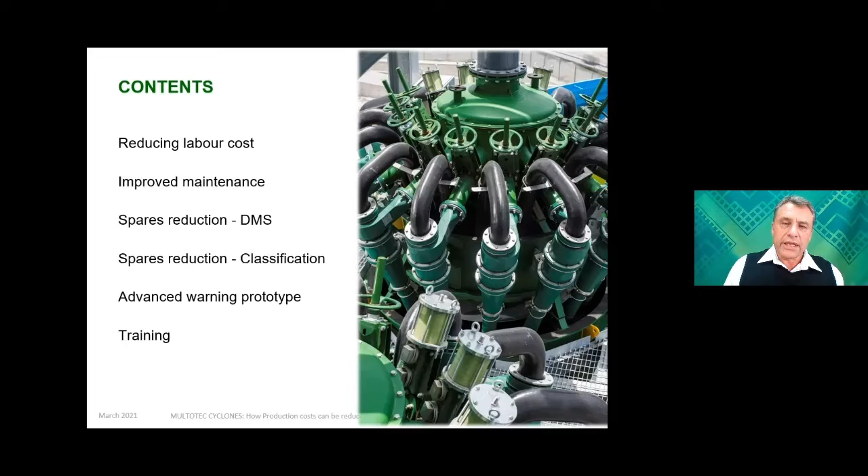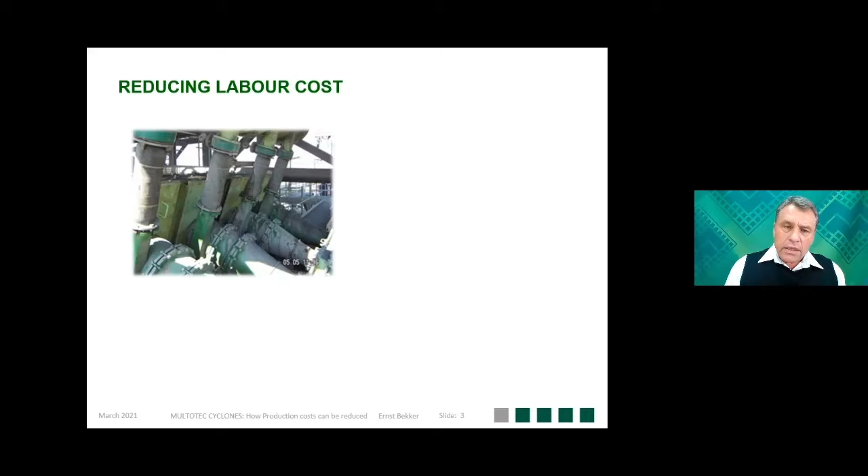In this application, in terms of the reduction of labor costs, it's a pre-concentrating dense media separation process, feeding then a mill section. These cyclones originally were cast iron, with an expected life of about 1.5 months.

The client requested to see if we could improve the operational life of the unit. So we suggested that we rotate the parts during every maintenance, 90 degrees, and that extended the life up to 2.5 months.

During the initial stages of this operation, it was found that there were relatively frequent blockages at the inlets of the cyclone. The reason for that was that the crusher settings had to be increased in order to increase the throughput through the process plant.

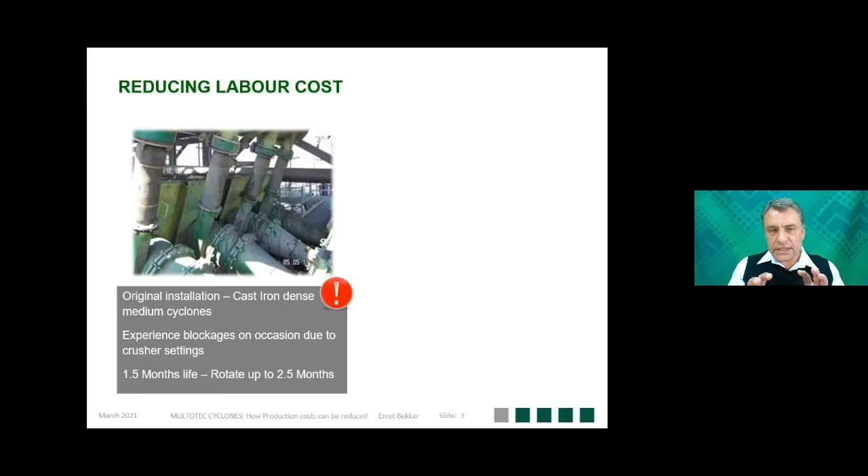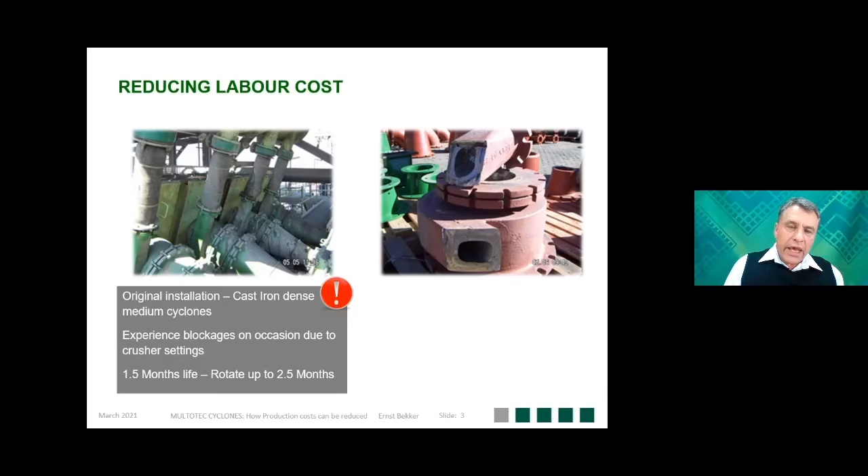So just before the maintenance period, it was then noticed that these blockages started to diminish, and the decision was made to take one of the worn units, cut the inlet open, get the dimensions, and a new cyclone was supplied for this process.

A ceramic lined cyclone, because to make modifications to a casting is not that economical, quite expensive. By converting to the ceramic lined cyclones, the operational life increased to 3 months without the need to rotate parts, which helped the client with cost saving in terms of reduction of labor.

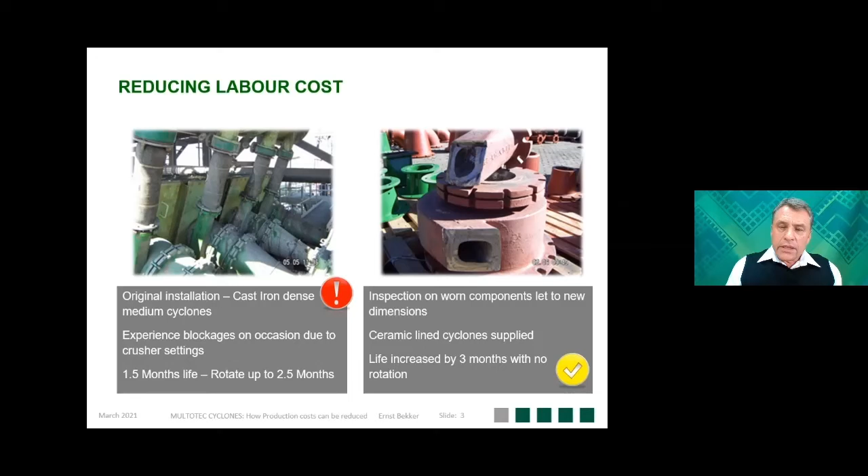He doesn't have to every time get people in to help loosen the bolts and rotate the parts and put them back together. The client then asked if we could continue looking at improving the life.

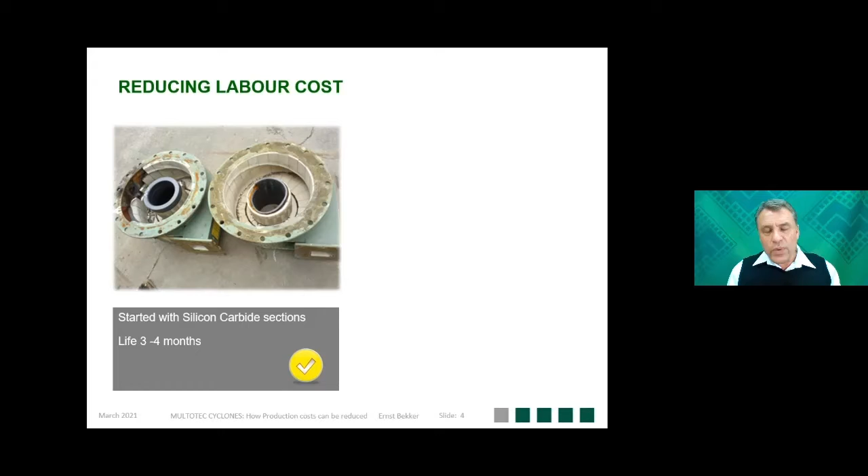So we started to look at silicon carbide. We had to make some design changes to improve the life of the unit, and we end up now with a unit that's completely silicon carbide, and the operational life is now extended to 9 months. All indications are it's possible to extend it further.

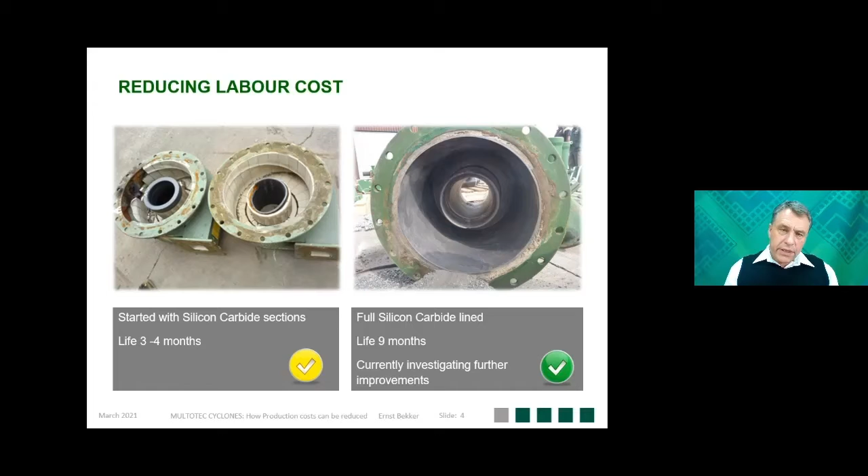So the cost saving at this point between a silicon carbide unit and the cast iron original cyclones is about 1.4 million rand per annum, or about $99,000 US. Compared to the ceramic lined option, 640,000 per annum, or about $44,000 US.

Now it's not big money, but, and this is important to remember, this cyclone sits before a milling circuit. And what the client noticed just before maintenance had to be commenced was that the yield, the amount of mass going through the spigot of the cyclone towards the mill, became too much.

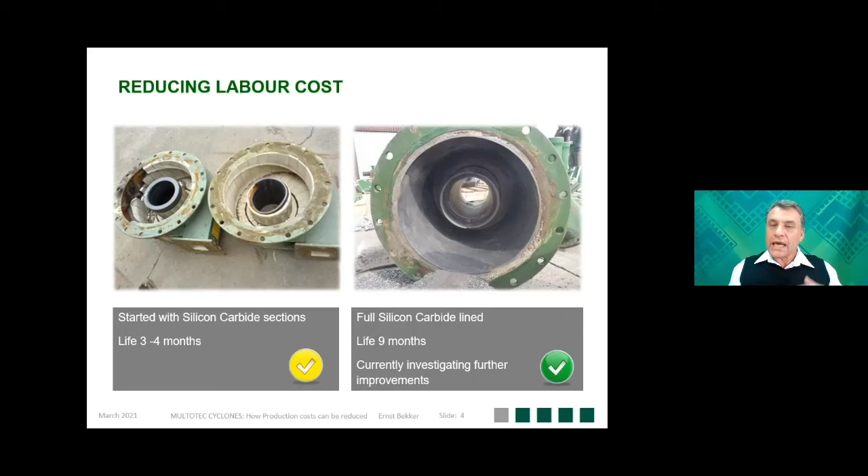They had to cut back on feed to the plant. By having the cyclone now operating with more consistent operating parameters, it's streamlining the throughput through the plant as well, and there's additional cost saving.

And then the maintenance is sometimes neglected. And when you neglect the maintenance, the cyclone efficiency starts to become affected, and that spills over into the rest of the process.

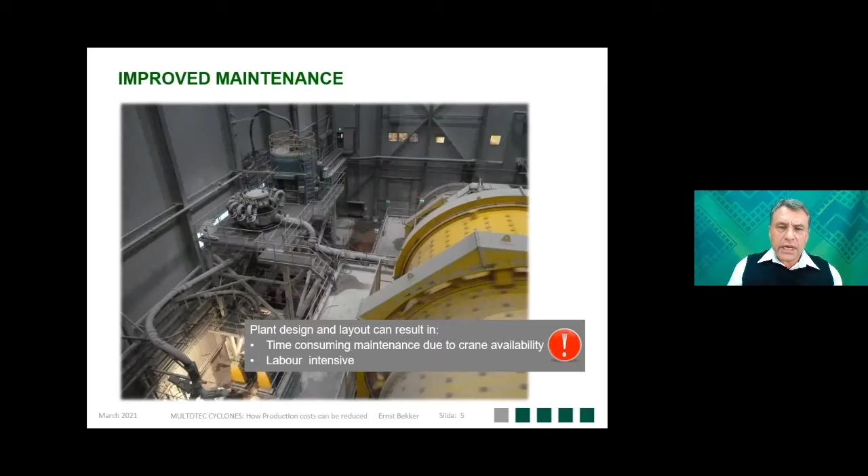So one of the ideas that we came up with is to incorporate a jib crane into a cyclone cluster, so each cyclone cluster has got its dedicated lifting mechanism. You save cost, you save labor, and it's safer to do the maintenance. So there is no competition.

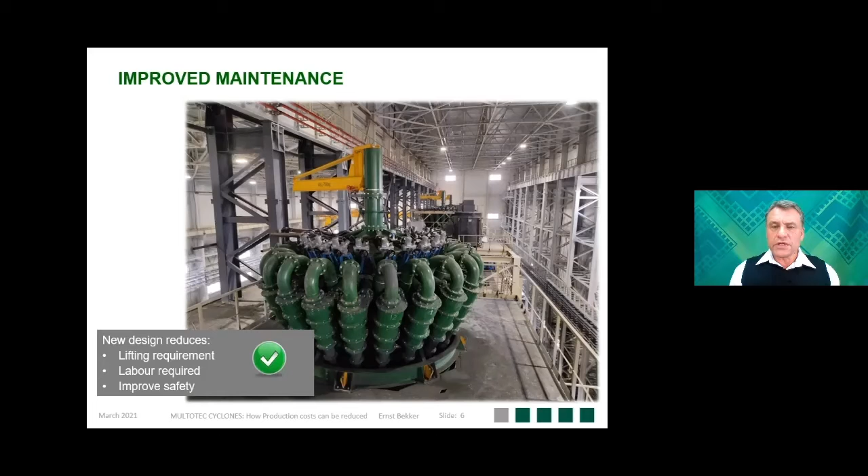You can do the maintenance whenever you need to do it. Because you can now do maintenance on a more frequent basis, you're enhancing the efficiency of this unit or cluster, and thereby also helping with the efficiency of the overall process.

Moving on to the spares reduction case studies. In dense media separation, cast iron is quite a commonly used material of construction.

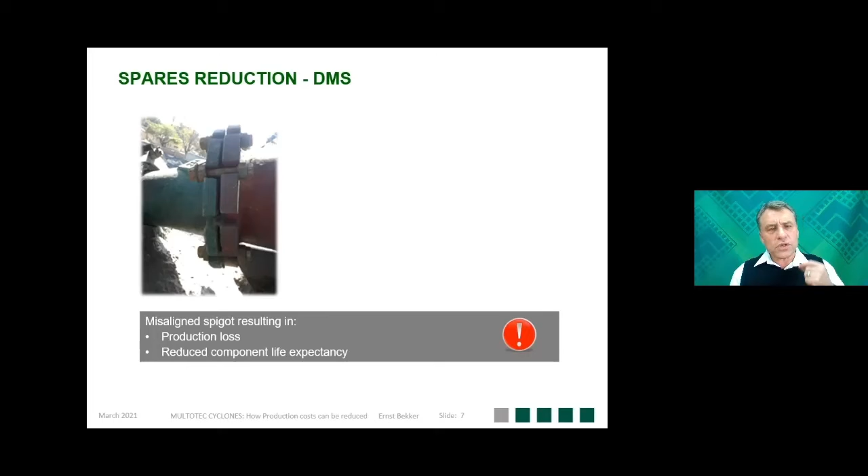This misalignment can cause production losses because it's misplacing material, creating an inward step, misplacing material in the wrong direction. It's also creating aggressive turbulence, and this turbulence shortens the life expectancy of the parts.

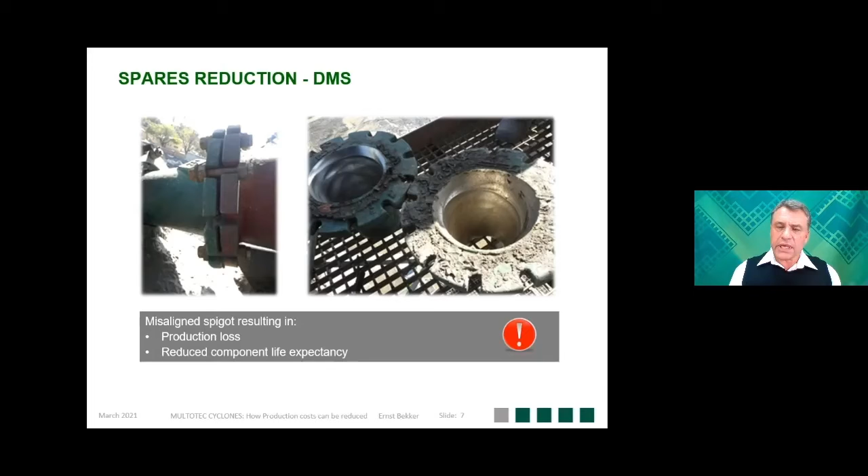The picture on the right shows items from this plant, and you can see the localized wear. The units have to be replaced while the rest of the spigot is actually still in good condition.

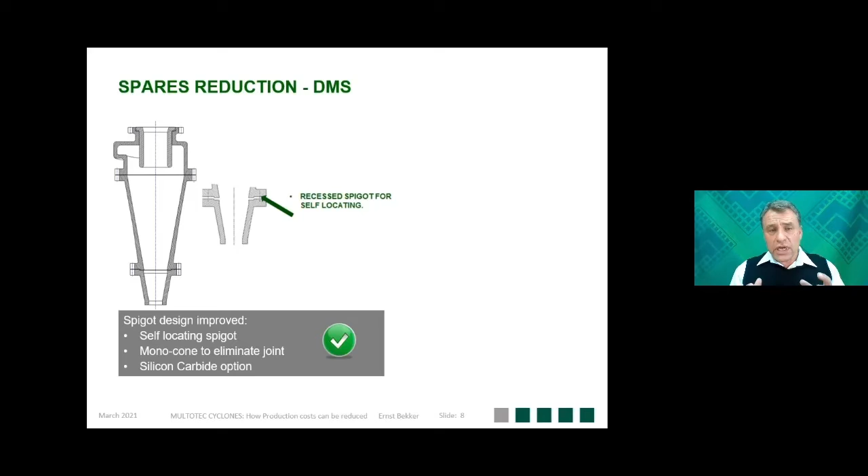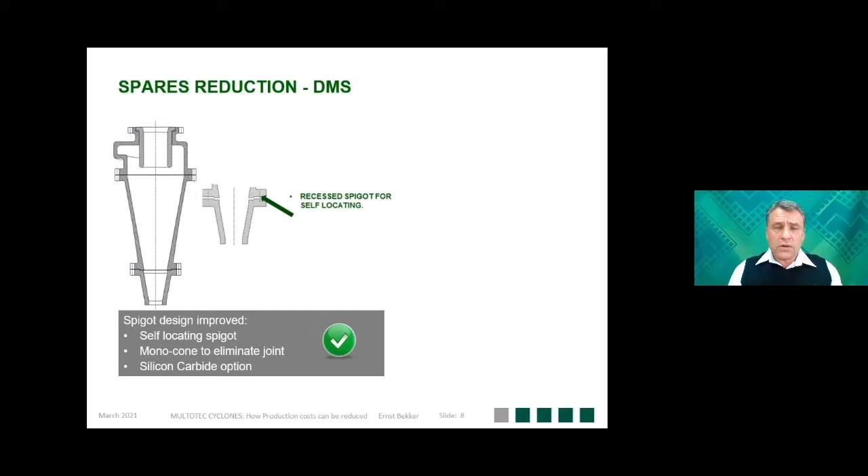So we embarked on a project to relook at our cast iron cyclones, and one of the design changes we've made is to look at the self-locating ring. Now you can locate the spigot and the cone together without the risk of getting an inward step, unless you do it deliberately. That's already helping to enhance the efficiency of this unit over a longer period of time.

Another aspect we've noticed is that in certain applications you tend to get localized wear at the joint between the cone and the spigot. That resulted in us looking at making a one-piece unit called the monocone. This monocone is quite suitable for low yield applications, meaning a small amount of tons going through the spigot.

The reason for that is if you have a high yield application, your spigot starts to wear too quickly compared to the rest of the unit. Then you have to replace the spigot, but now you have to replace the whole unit, so that's not really cost effective. But in applications with low yield, like in the diamond industry, that will be successful.

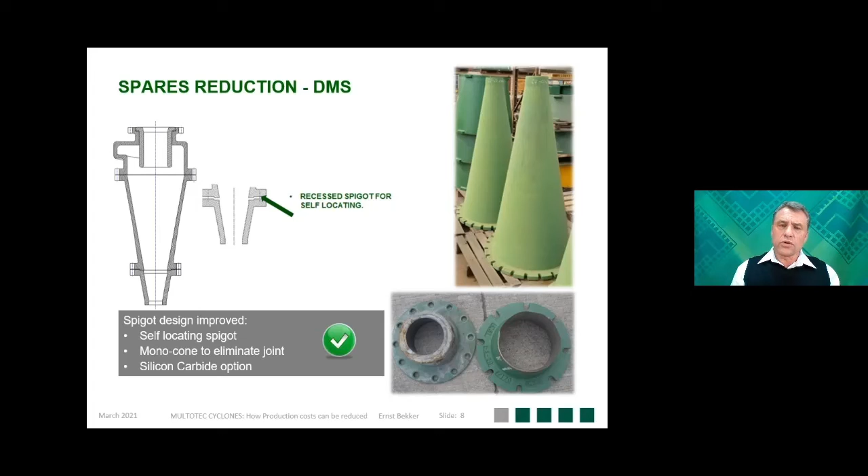For your high wear applications, silicon carbide is again an application that's proved to be quite successful for us. The cost saving on this specific item, on this specific plant, is about 30,000 Rand per annum. So it's relatively small money, but the impact is significant because the cyclone is now operating more consistently, since spigot diameter is a very important parameter for good dense media cyclone performance. That's additional cost savings to keep in mind.

In terms of classification, this is a milling cyclone operating in a SAG ball mill circuit. The material is quite aggressive, as seen in the picture in the center. Originally these cyclones were supplied with polyurethane spigots, and they lasted only 5 days. So the client decided to move over to rubber spigots, and that only lasted 7 days. So the client decided, no, rather go back to the polyurethane spigots.

But because of this continuous use of polyurethane spigots, he sometimes ran out of stock, and then he was operating these cyclones without a spigot. Now, to operate a cyclone without a spigot in a milling circuit is also looking for trouble, because you're placing the whole milling process under strain.

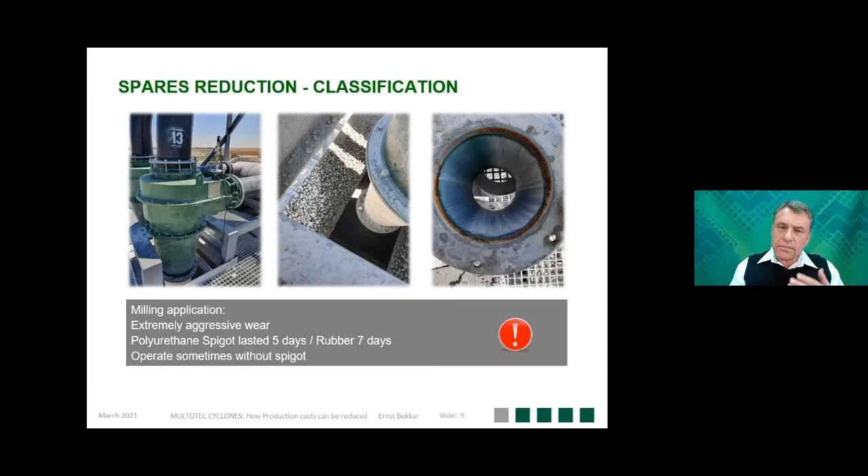So the spigots that this specific cyclone is using, as shown in this picture on the left-hand side, the item on the left is the polyurethane spigot that was used. The item on the right shows a ceramic lining that is encapsulated in polyurethane.

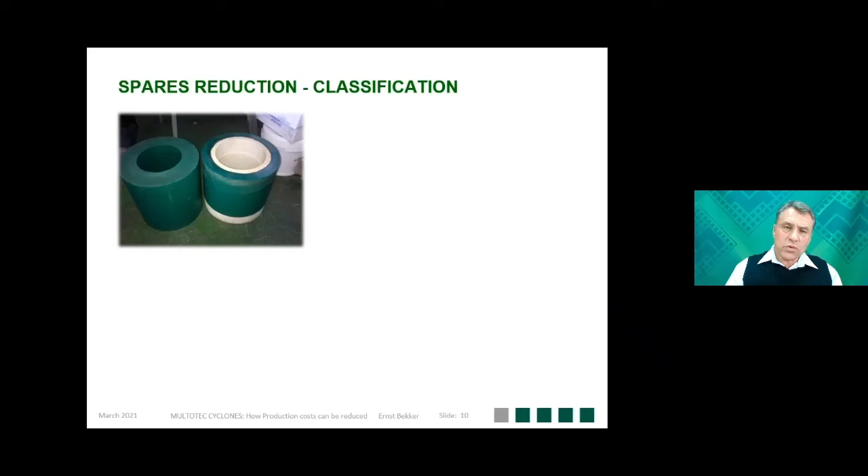Based on the success with silicon carbide, I decided to look at silicon carbide as an option for this specific client. He took the unit, installed it, and I asked to come and inspect the unit a couple of days later. So that's the unit that I had to inspect.

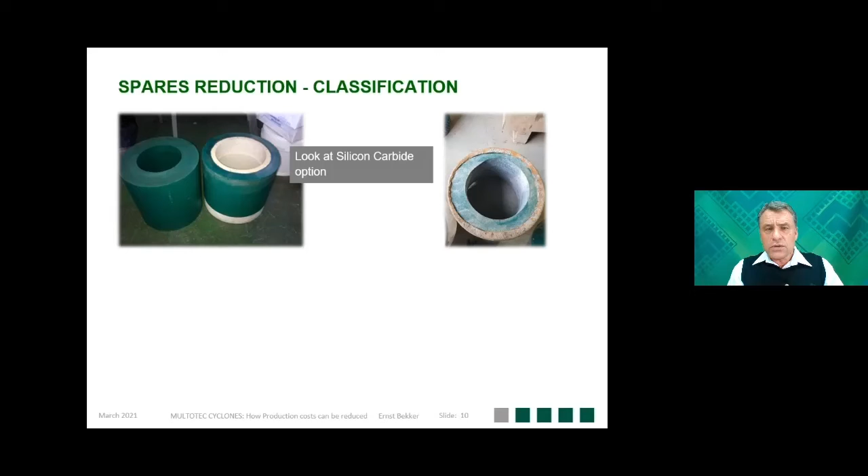I was looking at this unit and asked him, what am I looking at? Because at this stage it looks like the polyurethane spigot. He told me, no, that is your idea of the silicon carbide. It only lasted 4 days. So you're never too old to learn.

The reason why it only lasted 4 days is silicon carbide is very hard, but it's also very brittle. And the type of material being processed through this milling circuit indicated that this is not the right material of construction.

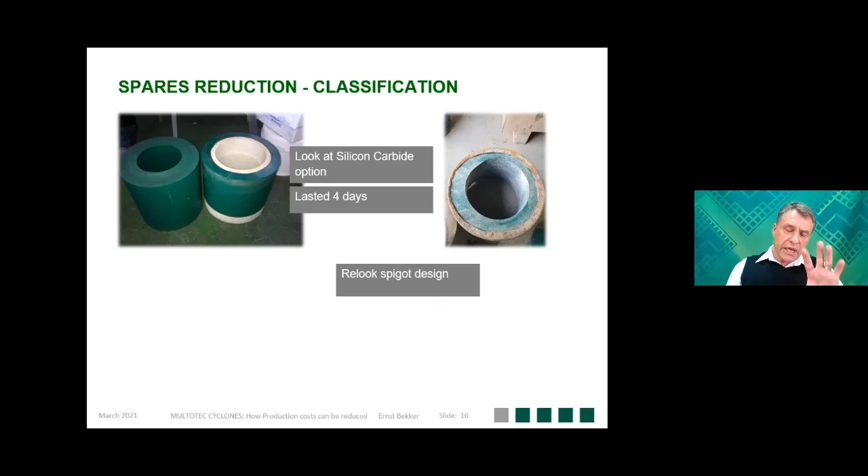During that period, we were also looking at redesigning or adding to our spigot range, and this design allowed us to re-look at a rubber spigot. The spigot you see in the picture on the right bottom is what the unit looks like after 19 days. So the client is very happy with this current situation, and we are looking at improving it further.

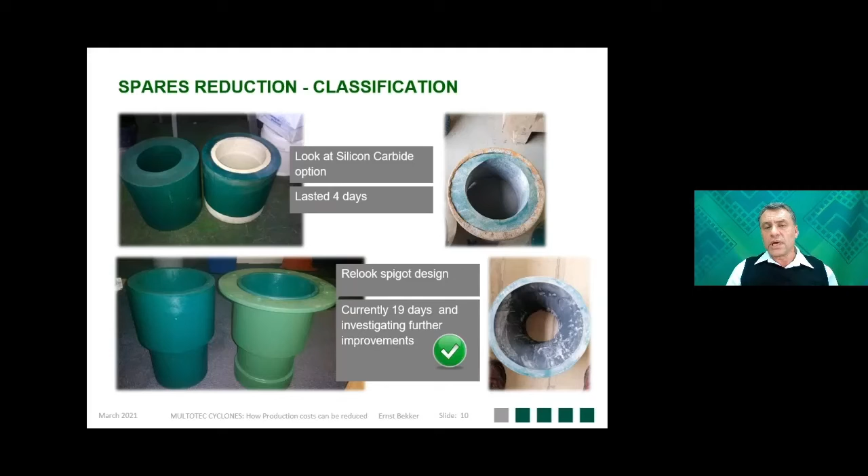So again, the cost saving between polyurethane and rubber is about 110,000 Rand per annum, or about 7,500 US dollars. But the additional saving in terms of optimizing the mill, that's where additional cost saving comes into the equation. Then moving on to the advanced warning prototype.

Underground coal mines use continuous miners with rotating drums, and on those drums are picks. The picture on the left-hand side is a statue that plant personnel constructed of picks that came loose from the continuous miner or broke off. They find their way to the operating plant. You've got overbelt magnets, but due to the weight and design of this unit, it's not always possible to have a 100% success rate in recovery.

The point of this pick is tungsten carbide. Very hard, and it can create a lot of damage inside the plant.

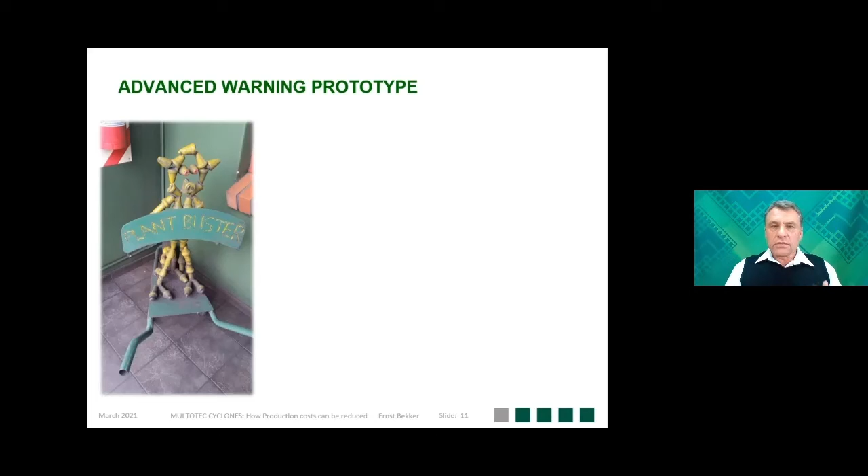Now, in coal operations, ceramic lined cyclones are used extensively because it's cost effective. Unfortunately, when these picks get into the ceramic lined cyclone, it creates havoc. It impacts on the tiles, destroys the tile, and eventually you get the exposed shell. The plant operational people don't know about it until the steel has worn ultra thin and the cyclone bursts open. Now you are forced to have a shut.

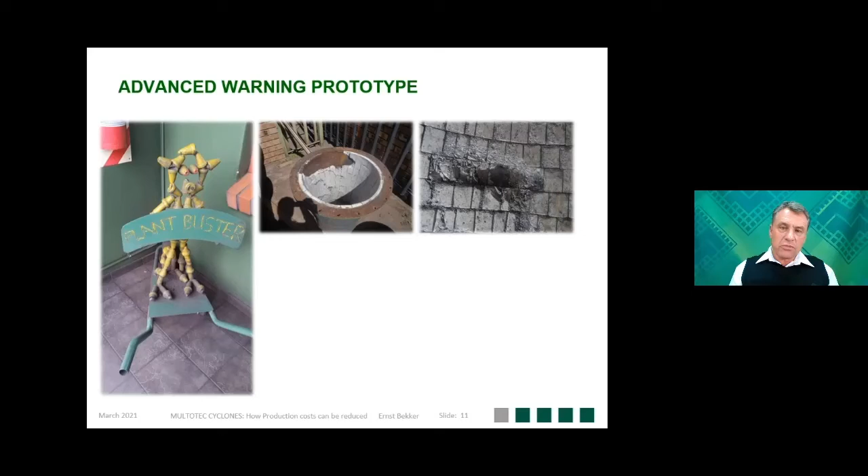One of the solutions to this type of scenario of foreign metal is the use of cast iron, and it can be done in different alloys. Very successful if you have foreign metal. However, if you do not have a high frequency of steel, then ceramic lining tends to outlast cast iron units. And in this case, the client preferred to stay with ceramic lined cyclones.

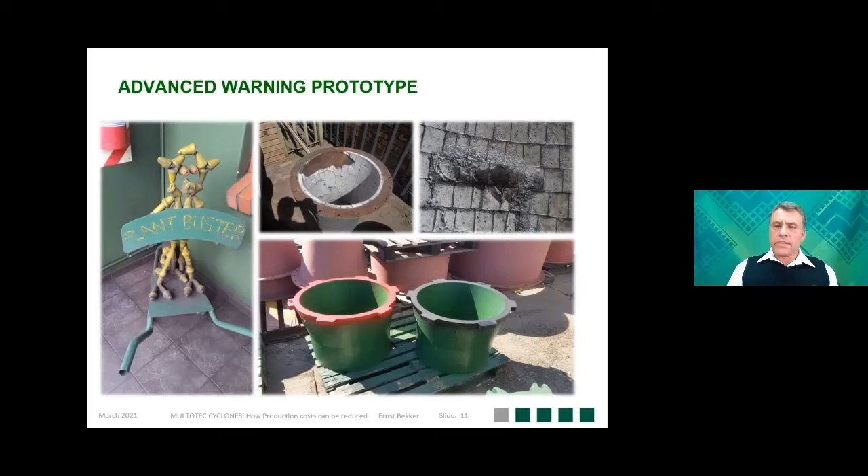Now, here's the interesting thing. When we started with this sensor, we said we need to look at ways of shutting down the cyclone so that the steel can leave the cyclone, because we want to protect the unit. As more information became available, we realized that idea is not the best idea, and the reason for this is as follows.

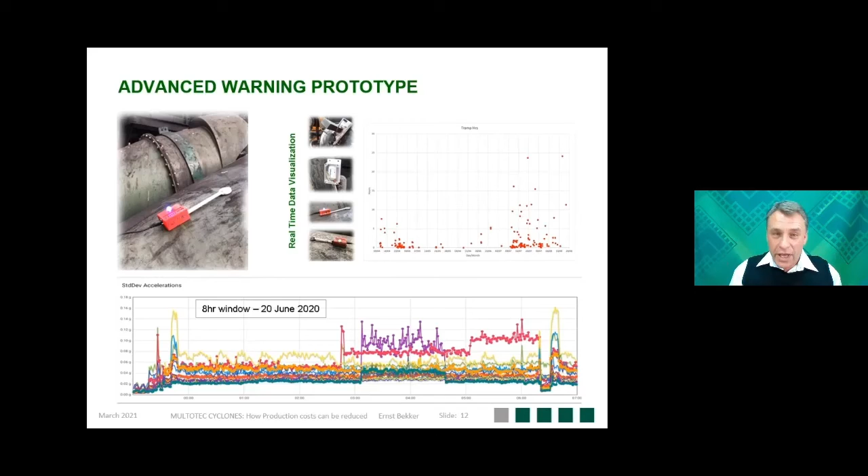Take a 1,000 ton an hour coal plant, processing with a yield of about 60%. At a current coal price of $100 per ton, and working at 14.5 Rand to the dollar, that's generating revenue in the region of 870,000 Rand per hour. To put it more in perspective, that's 240 Rand per second. In dollars, that's $60,000 per hour, or $16.5 per second.

So this has now turned into a different approach, where the sensor is used as an advanced warning to the client, because you don't see the steel coming into the plant, and you don't know what damage has been caused. Now with the sensor, you know which items have been exposed to the steel. With the next maintenance, you can inspect those units more intensely and make sure you're not caught off guard by having unplanned shuts, because those are not short, and you're losing a lot of money.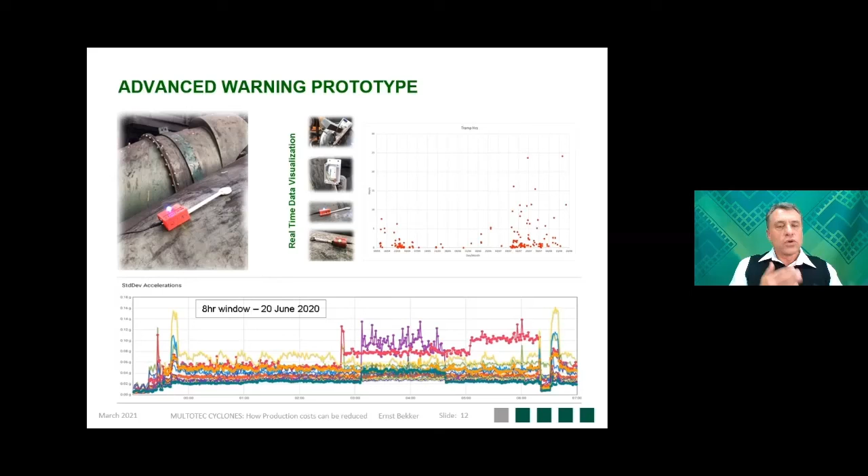Then lastly, in terms of training, Multotec provides training at our head office, obviously adhering to social distancing. It's also moved onto an online platform. It can be on-site specific sessions as well as online sessions, and then there is access to the YouTube knowledge platform and the Multotec website.

Now, the importance of this training is that it is not sales presentations. It is to share information and help our customers understand why a specific piece of equipment has been designed like this, why it is in that position in the plant, and what the impact is if that piece of equipment is not operating correctly. That comes into maintenance: how to do maintenance correctly, how to ensure you use the right items, because if you're looking at saving cost by using substandard parts on the equipment, eventually it's going to bite you. These training sessions put the bigger picture to our clients, giving them a better idea of why we are so fanatic about ensuring that equipment is maintained with the correct OEM parts.

Sometimes people say, oh, but I know this, it's obvious. Yes, and that's part of our aim, because a lot of the times our clients already know this, but they've forgotten about it. These training sessions take this piece of the puzzle and build the complete picture, helping our clients understand again the importance of proper maintenance, and also understand how the equipment, if not operating correctly, will have a financial impact, because not everyone understands there's a financial implication if the equipment is not operating correctly.